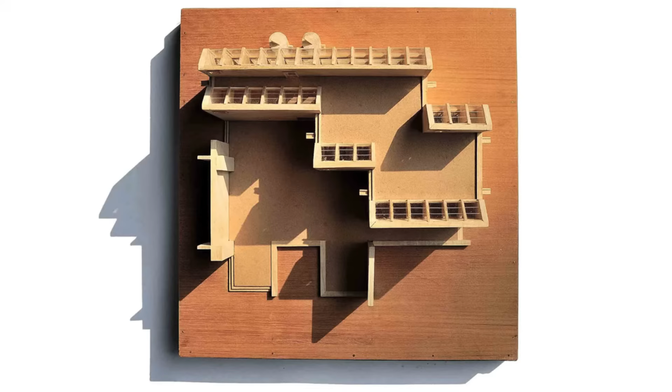But green by nature, I'm talking about buildings like this. This is the Alliance Francaise in Ahmedabad, a model. Why I'm showing you the model is because you can see that all the light in this building comes from skylights facing north. There are no windows at all on the south, east, or west. The skylights also have ventilators to let the hot air out the top, and they drop light into spaces inside the building.

On the back north wall, they fold down and become windows over the north. The wet areas, which are always a problem, particularly back in the 70s when I designed this, we plugged in small plugins you can see there. So the toilets and basins were plugged into the wall in the back. This project also had something I call a public domain.

So when we talk about green, in our group we tend to talk about physical things—recycling water, energy reduction, passive use of energy. But I also think we need to start talking about the aesthetics of green. A building, in my opinion, if it's just a glass box with low E glass and some solar shades, but it's an ugly building with no public domain, no interaction with nature, then it's not a green building. I think we've got to expand our viewpoint.

This building is green by nature, it has no air conditioning. There may be 1 or 2 fans stuck in some of the lower spaces, but there aren't even fans here, and it doesn't need electric lighting. This was built back in 1973-78. These are the pivoting doors out into that public domain. As you can see, there are no windows, the light is dropping from the top. It's a very simple open space kind of structure for the Alliance Francaise, where they used to have their cultural programs and lectures and even teach French.

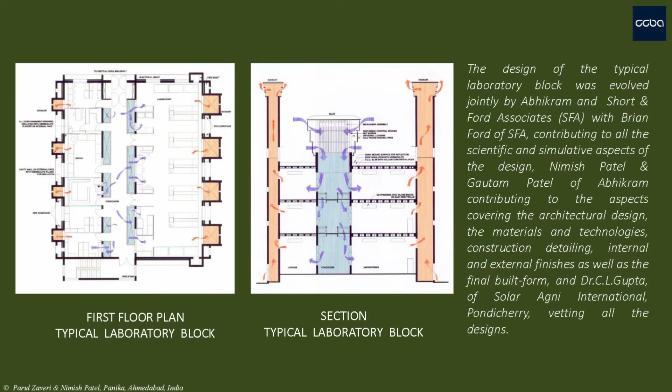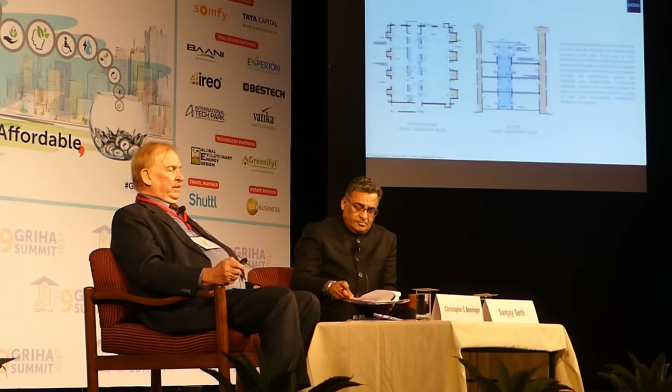With my eyesight I can't read this, but basically what I'm saying is it lowers the temperature from 45 down to 28 to 32. The temperature doesn't change dramatically over any given day, and you get airflow inside the rooms. Basically, this is a practically energy-free solution to cooling buildings.

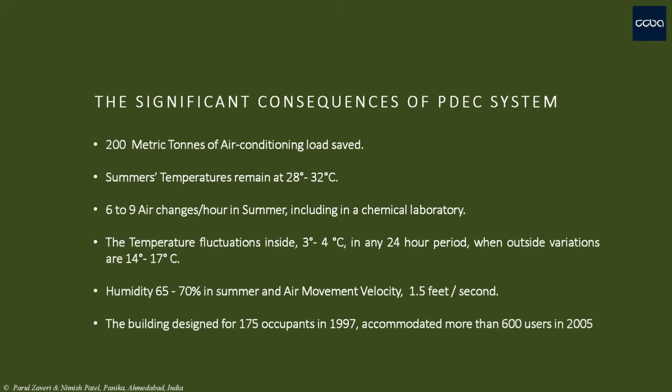Now, green by numbers is what you and I are all involved in. Suzlon One Earth is a company whose business is sustainability; they make wind energy. When I was designing that, I started looking at Indian tradition, and I looked at Fatehpur Sikri, and I said, wow, that's so nice.

It's got beautiful water, a public domain, it's aesthetically sustainable. The ground floors open up right into the garden, and it's a low-rise building. I said I'd like to do all three of these things in Suzlon.

Then I was working in Cochin earlier, and I came to love deepstambhs where you can burn small votive candles. I like the jallies, the controlled sunlight, the air coming through. I like the sloped roofs, and there's an open space, a public domain.

I could learn some 4 or 5 things from these temple complexes, which are all over Kerala, all over India in fact. So my point is we can actually learn architecture by looking at our own culture.

Now this is a site plan of Suzlon One Earth. What I'm trying to say here is all the vehicles are kept in the setback on the outside of the plot, with ramps down into parking underneath. About 500 automobiles can be parked there.

There's also a kitchen for the dining hall, which is on that lower level, and the circular water space is actually located at the lower level too. At the upper level, we have gardens and pedestrian areas.

So the idea was to separate automobiles from people, let people have their own domain, have a Brahmastan, an open space to the sky, and then you get these inside-outside spaces like the classrooms in the Learning Center, where we have verandas to sit under shade, or in winter you can sit out on decks, even in the evening. And then we use louvers to cut the sun and the glare into the spaces.

Now, this is a kind of courtyard. We decided to cover the courtyard with photovoltaic cells. In this campus, we produce about 9% of the energy on campus with smaller windmills, photovoltaics, and there's a lot of power-saving devices. In any case, all of the energy here is non-carbon, in the sense that it's all produced, either the 9% on campus.

You can see the louvers, which cut the sun, and at nighttime the louvers look like this. You can see through them, so they don't cut views. You can actually see through them. They're slightly at an angle to completely stop any sun hitting the glass walls behind.

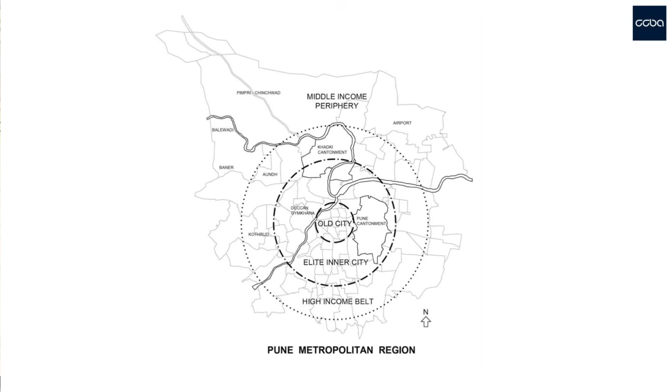This is Pune - people live in chawls, they live in slums, they live in villages. This is where 70-75% of the people live. Now, I drew this map to show the center of the city, any housing built there, the EMIs, the equated monthly installments, are so high, only 3% of the metropolitan area population of 10 million people could ever afford to buy an apartment.

In that central circle, the same thing is true with Bombay. South of the airport, 3%. North of the airport up to Thane, another 6%. In my second circle, only 6% of the people can afford that. So in the whole metropolitan area, if I take these two circles, only 9% of the people can even think of living in a new accommodation close to the city.

Of course, there are many people in slums, urbanized villages, workers' quarters also overlapping this. And in that outer circle, another 17%. In Bombay, another 17% can live up to Karjat, Ulhasnagar, those areas, 2 hours train ride from the city. So we live in a society in which people are excluded from buying any kind of shelter. I would say roughly 75% of the people cannot afford any kind of housing being offered in the market today.

Now there are many of my friends, like Ashok Lal, who's trying to attack this by designing very low income small units. So this is one of the approaches. I think we should look at those approaches. But this is the income distribution in Pune.

I don't have my glasses, but I want to say that 5% of the population are probably migrants from Vidarbha or other states, but they live at subsistency. That is, they spend 85% of whatever income they have on food and the fuel to cook it. They may live under flyover infrastructure, they may live under railway carriages, whatnot. They live on the street, basically.